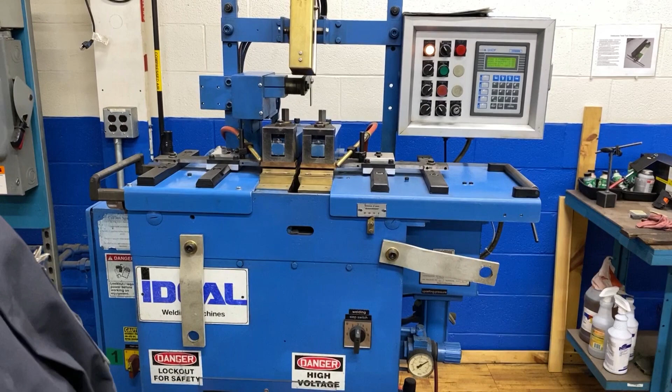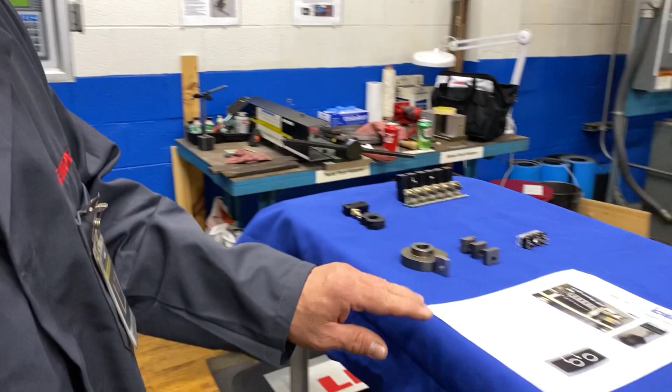Today we're going to walk through the calibration of an Ideal BAS-051 welder. The procedure we're going to be using is a paper copy that's very well documented and spells out each one of the steps as you go through to let you know exactly what you're adjusting.

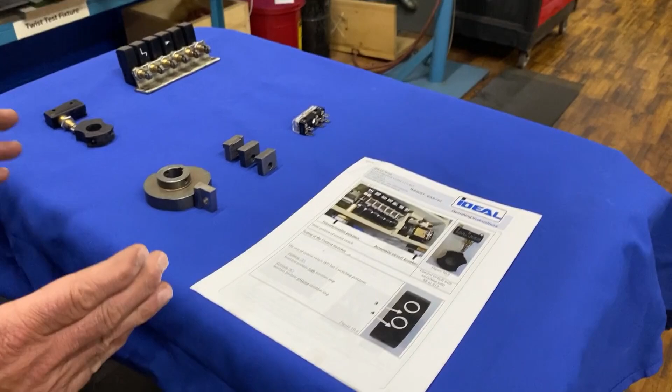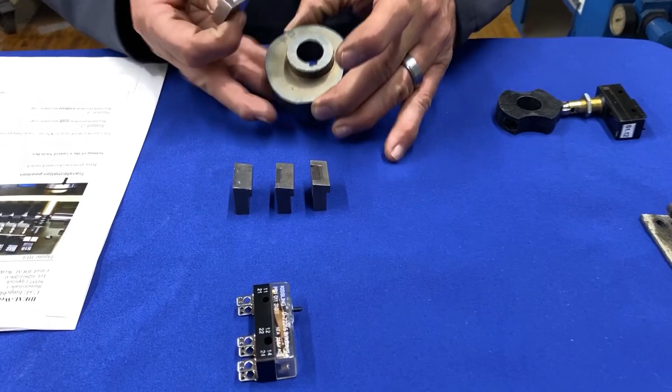So for clarity, I've laid out some of the components that we're going to be working with underneath the cover of the machine, just to give you a better view of what you're going to be looking at. So the cam we're going to be working with looks like this. And you can see it's numbered 1 through 6. And this is your cam follower.

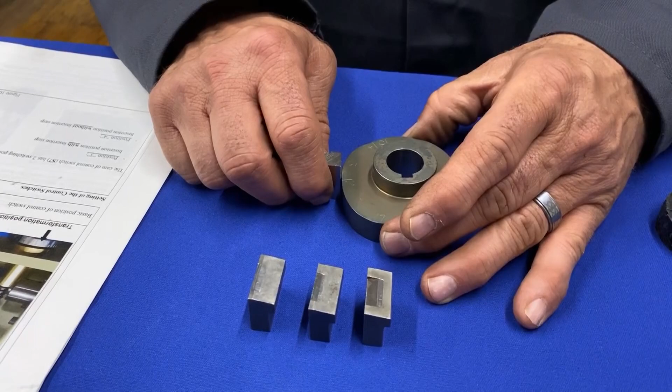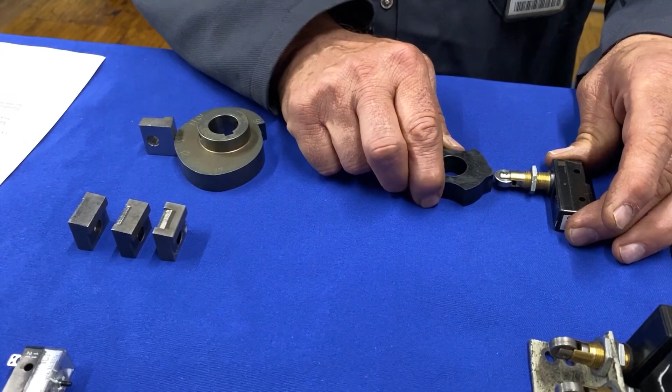During the procedure, we're going to be turning the motor fan to turn the cam to align the follower to a corresponding number. And then at that same time, we're going to be listening for this micro switch to trip from the actuator. This is the switch bar that's in your machine. This is the actuator that's going to trip it. And as you turn this, this is turning at the same time, and it's going to trip that switch. And that's when you're going to listen and come over here and validate that you're on that mark.

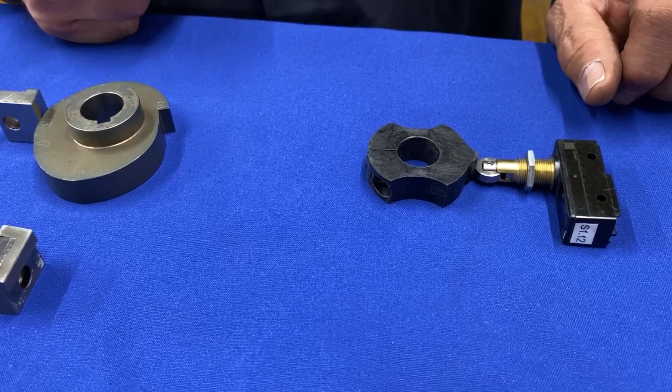If you are prior to the mark or after the mark when this switches, we're going to loosen this set screw right here, back it out, and slightly tap this in one direction or the other to make your correction so that you get a correspondence between the mark on the cam and the switch point on the switch. So let's go over to the machine and I'll show you what we're going to need for this operation.

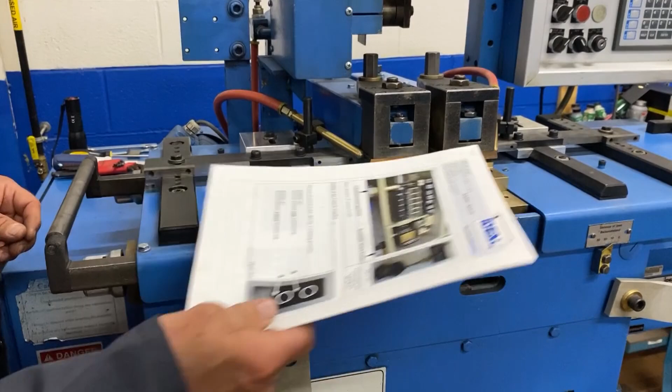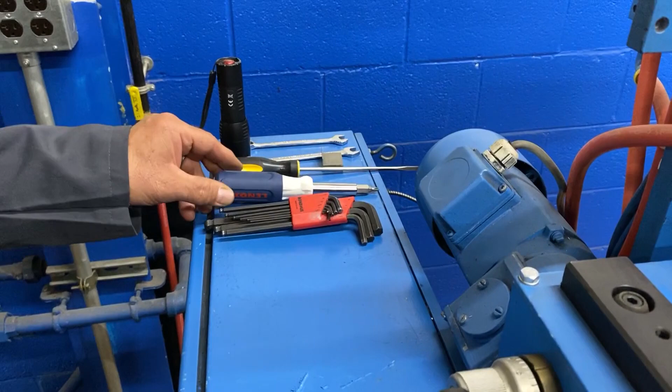So I have my instructions. I'm going to place those right over here. For this operation, you're going to need a set of metric Allen wrenches. You may need a Phillips head screwdriver to remove the end bell if it has a set screw in there. I'm using a flathead screwdriver as a poor man's stethoscope so that I can hear the switch trip in a noisy environment. You're going to need two 10mm wrenches, a flashlight,

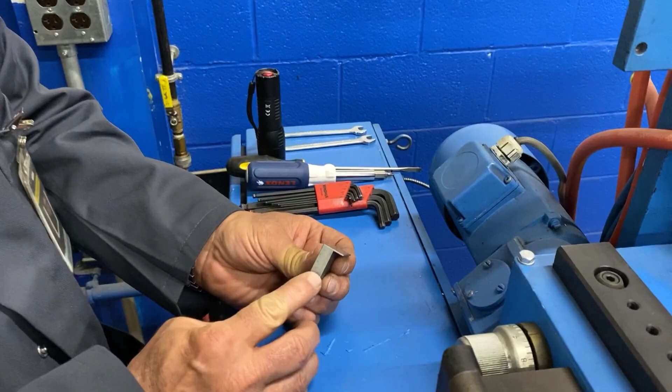and this block is actually a gauge that we manufactured. This is a 40 thousandths thick slab. This won't be used on this particular machine, but this process is suitable for 4 different variations of the machine: the 51, the 52, the 100, and the 120. So for the 120 being the largest of the machines, this will come into play in the adjustment of the automatic disconnect, and we'll show you that when we get to that step. So you won't need this for this machine, but you will need it if you have a BAS-120 and you're doing this calibration.

So the first thing we need to do is expose the switch and the cams. And that's under this cover here. We're going to loosen, remove our securing screws that hold our cover down.

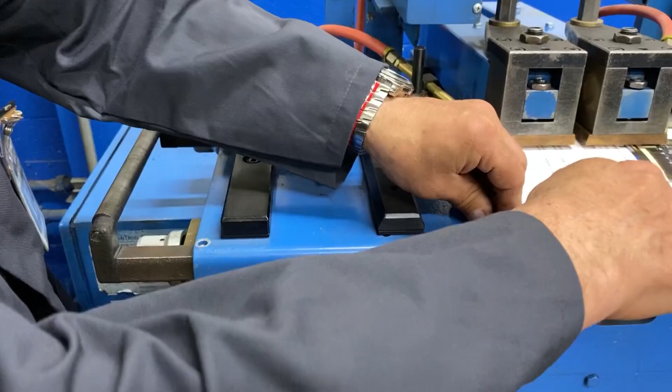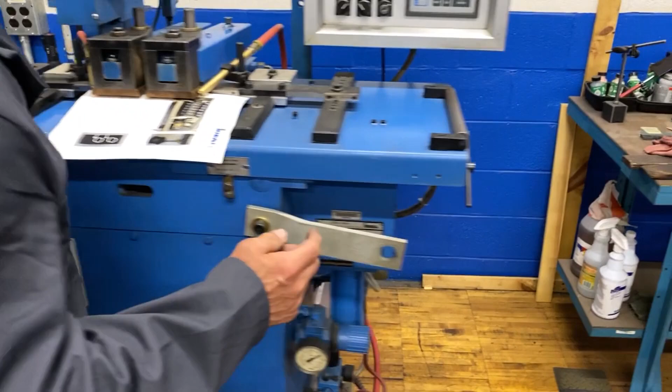So to do this procedure, it's not necessary to have the power on. So we could just turn this tap switch to the off position. The only thing you're going to need to have on to do this operation is your pre-pressure on this side of the machine. So your pre-pressure energizes the air to this cylinder that applies the pressure to this table to keep the cam against the follower. You're going to allow this to be in the on position for the majority of the operation. At one point, we're going to turn it off, and you'll see why at that time.

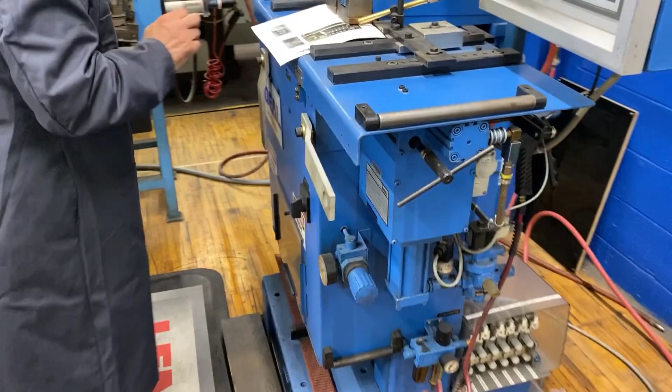So now that I've taken my screws off the top of the cover, I'm just going to lightly impact the lid here to break it free. Lift this cover off, place it on the side, and then I'm going to remove the end bell from the motor so that I have access to the fan to turn this for this procedure.

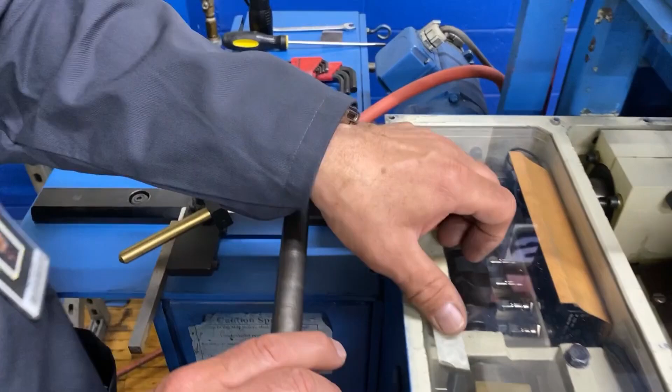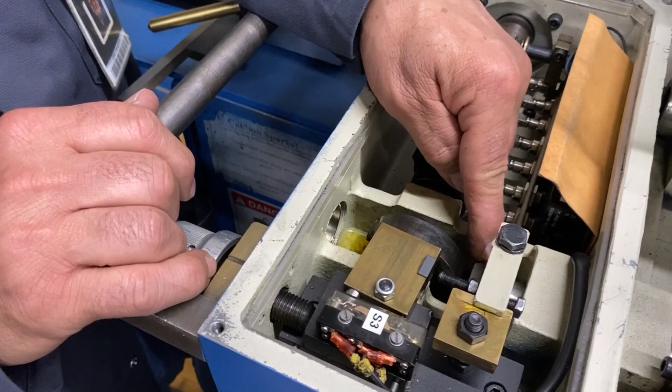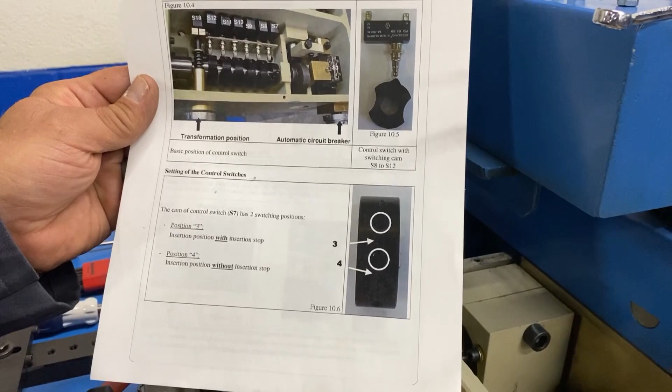So here you can see this is the cam. This is the follower that I showed you on the table. These are your trips, and these are your switches. This first cam is the starting position or the initial gap on your machine.

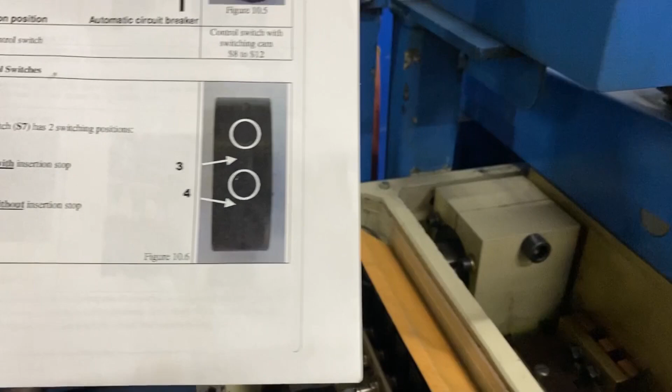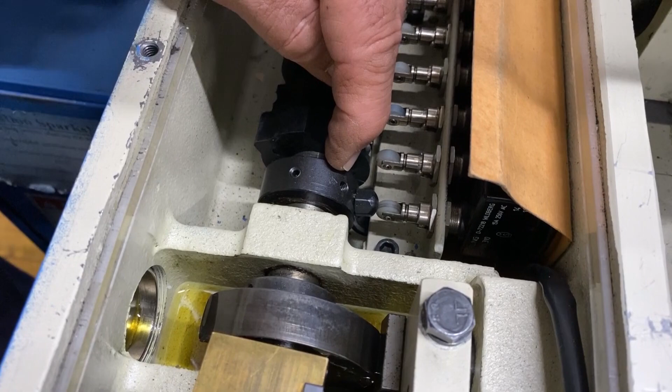You'll notice that there are two positions here, a position 3 and a position 4. If you have an insertion bar or a centering bar on your machine, then you want to make sure that this acorn nut is in position 3. If you do not have a centering bar, it would be located in position 4. So our first step is going to be validating that position.

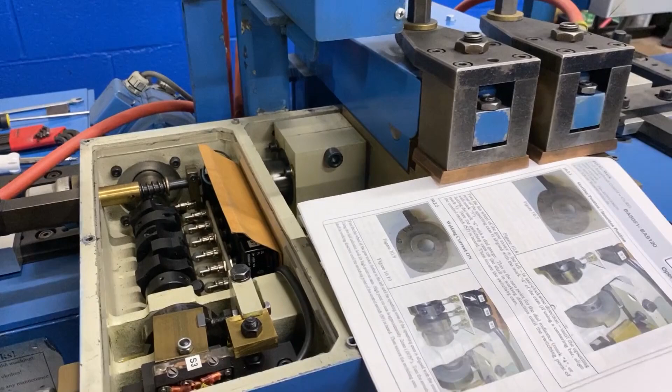So I'm going to back this cam off of that switch, and now I'm going to listen for that click, and I'm going to turn it in the correct direction.

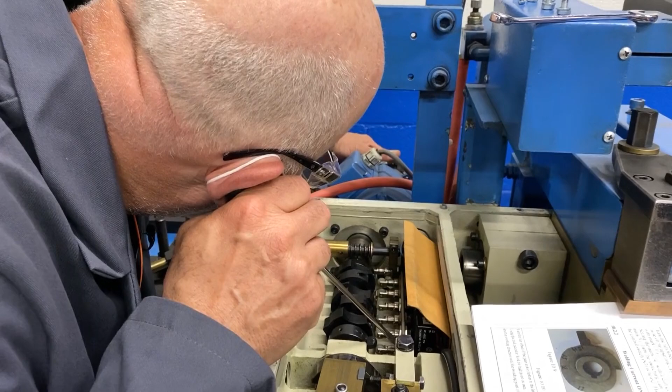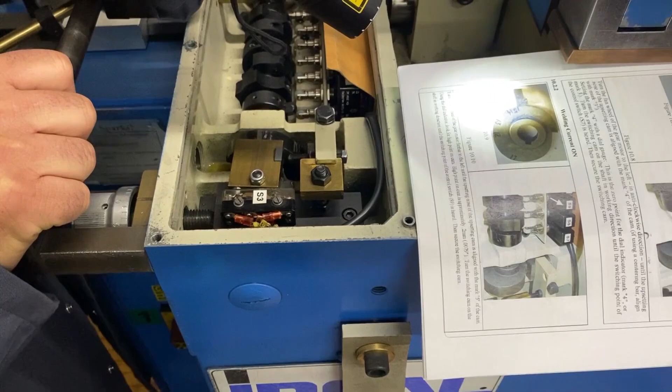And now I'm going to take my flashlight and I'm going to look for that corresponding alignment from the bottom of that cam that I showed you before to that number. That's what I'm looking for here. So in this position here, because we're in 3, my corresponding line is on 3. So I know that that's set correctly.

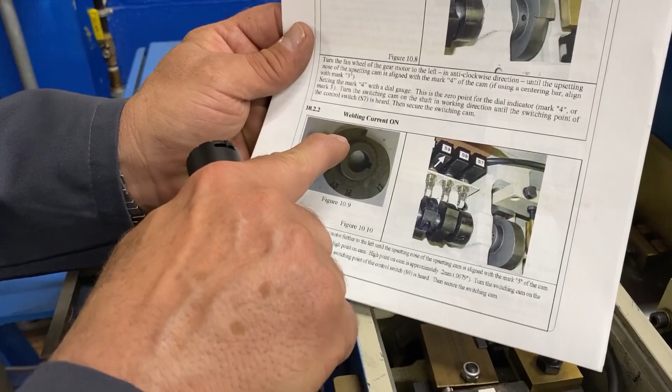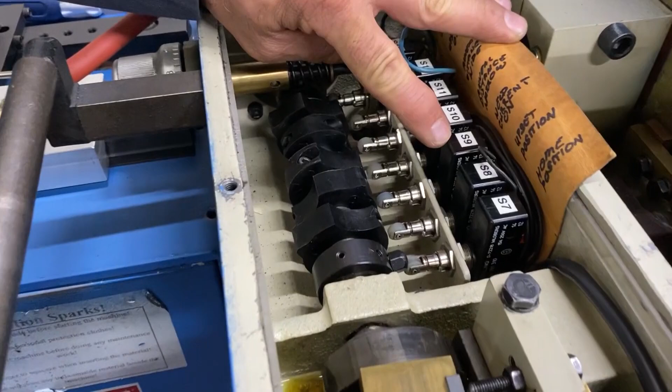So now we're going to be going to the weld current on. This is S9. We'll find that on here. Lift that up. Mark S9. And you can see I have the back of this marked with the corresponding function of that switch. Weld current on. So again, we're going to see where that trip is on that cam here. We want to move that to that switch position.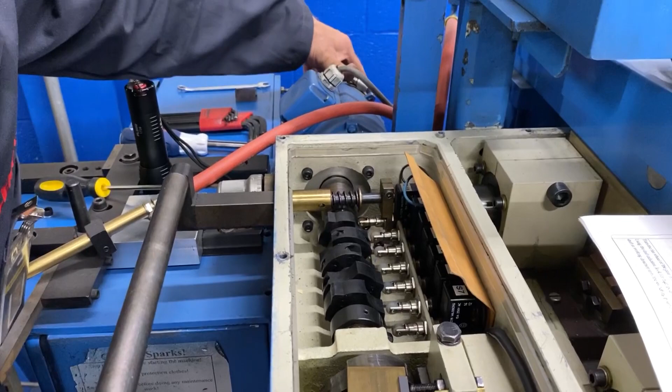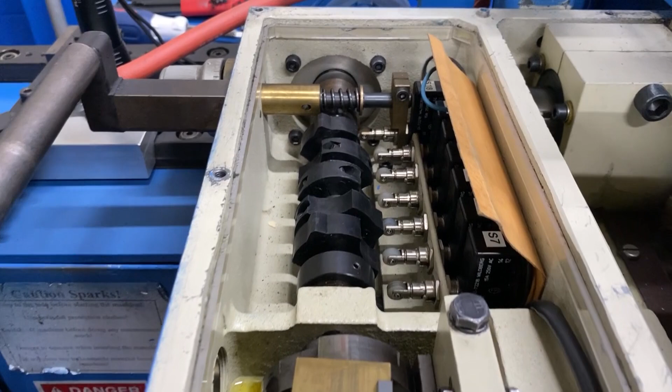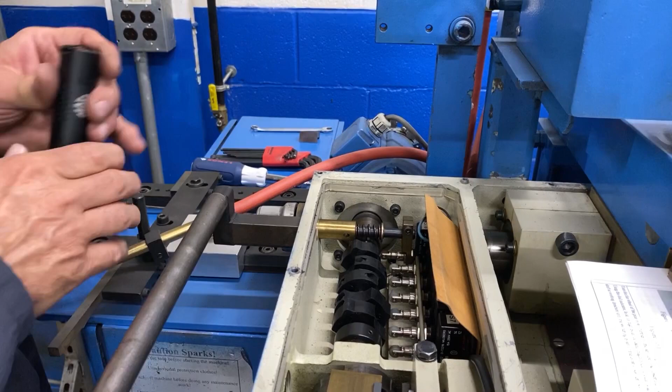I can move it quickly getting up there, but as soon as I see it touch, I want to stop, listen for that switch, and turn it very slowly till I hear that click. At that time, again, I'm going to look at my mark, and I want the bottom of that follower to be aligned with the mark on the cam. If everything is good, we move on to our next setting.

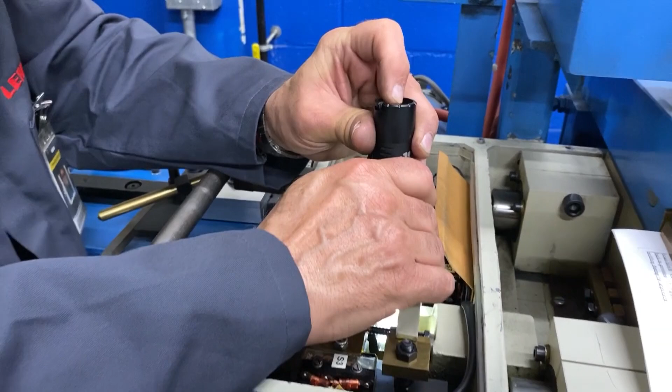This is the upset on, and this is going to be switch number S12. Just like before, find our S12, take a look where our trip is on there, and now I can quickly move until I see it just make contact with that switch, and I backed it off a little bit. And again, listen for it. Got my click. Come down here, look, and my mark is on my cam.

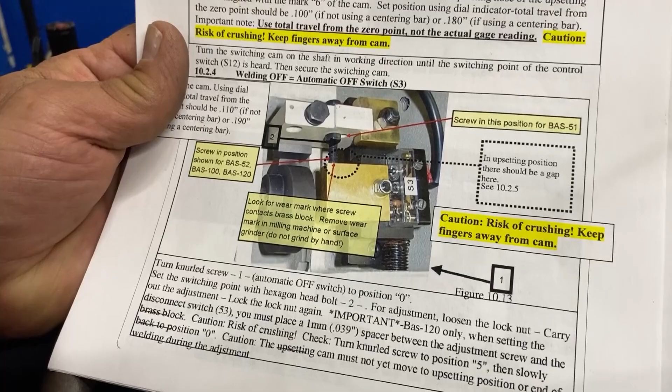The majority of the time that you're doing this calibration, it's merely going to be a validation of the switching point. You rarely will have to adjust, but we'll show you how to adjust should that be necessary. So at this point, this switch also corresponds to our next setting. So we're not going to move our switches at this time. Now we're going to check our automatic disconnect. This is the current cutout that shuts the voltage off to the jaws at the appropriate time. So these two work hand in hand.

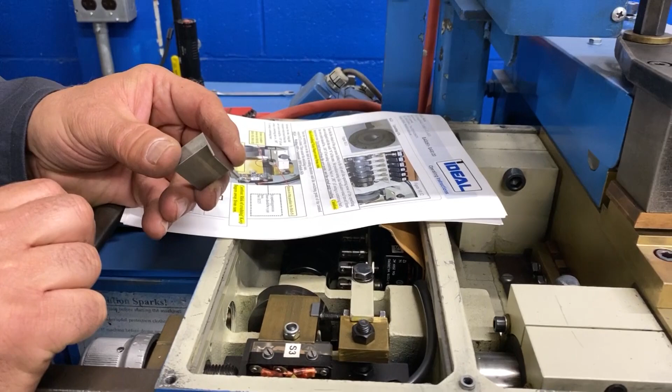So again, for the BAS-51, 52, and 100, you're going to be adjusting it just as you see it here. If you're adjusting for a BAS-120, this 40 thousandths feeler gauge needs to be introduced into this area to add that value. But again, this is for a BAS-120 only. So this is a smaller machine. This is not going to be used. But again, if you have that BAS-120, this is where that would be used.

So to do this adjustment, we're not going to turn the cam here. We're going to turn the dial on the side. If your machine still has the original switch that came with it, chances are it's going to have a clear cover, which makes it extremely easy because you can see the switch contact. And as I turn this out, you'll notice the switch into the closed position. And now when we turn it back, you see that switch point. You want that to be at 0.

Let's just say, for the sake of discussion, that it was not. Okay? So this is where you're going to use your 10mm Allen wrenches. I'm going to break free the jam nut on the back side of this screw. That's a trip screw for this. And then I'm going to see at what point it trips at and adjust this as necessary to get it to trip right at 0.

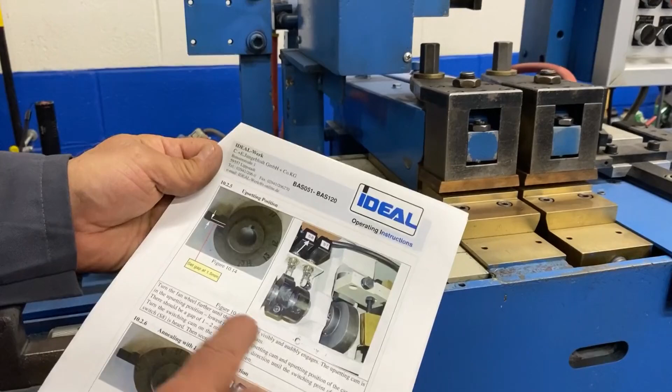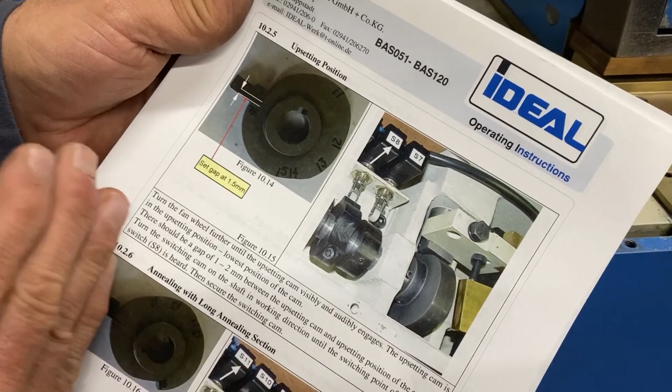The reason why I do this is on the next step, we're going to be running the cam so that the follower falls off the edge while trying to listen for the S8 to trip. If I have the pre-pressure on, the noise of the upset will mask the trip of the switch. So in this case, we want to have no upset coming on so that we can hear our switch trip. So find my S8. Listen for my switch.

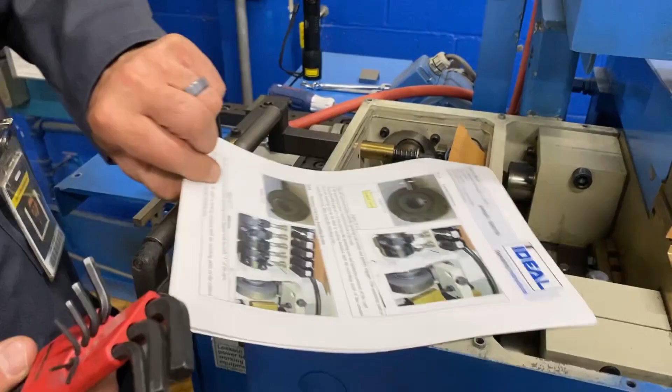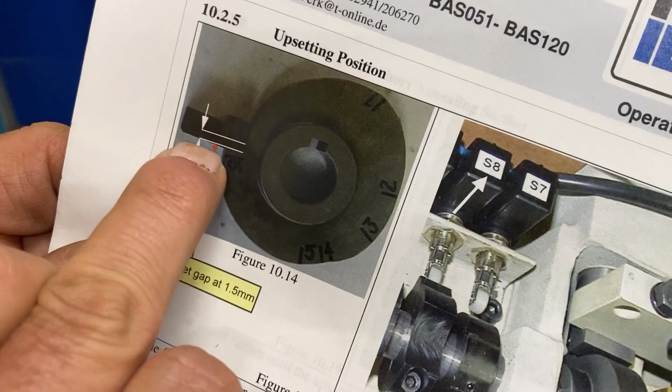And now I'm going to take and make a measurement. And we're measuring between the bottom of the follower and the flat of the upset on the cam. This is done, it's a 1.5 to 2 millimeter setting. So let's start with the 1.5, the smaller of the two.

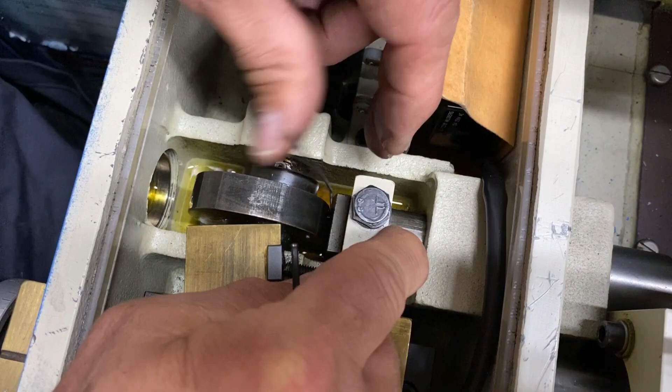And I'm going to lay this on the top of the cam surface. And I'm going to take the follower and I'm going to pull it forward. And you can see that there's a loose fit with a 1.5 millimeter. Now I'm going to take my 2 millimeter and repeat the process. Put it flat. I'm going to pull this forward, and you can see that I have a slight interference fit. I can't get it to go over to 2 millimeter.

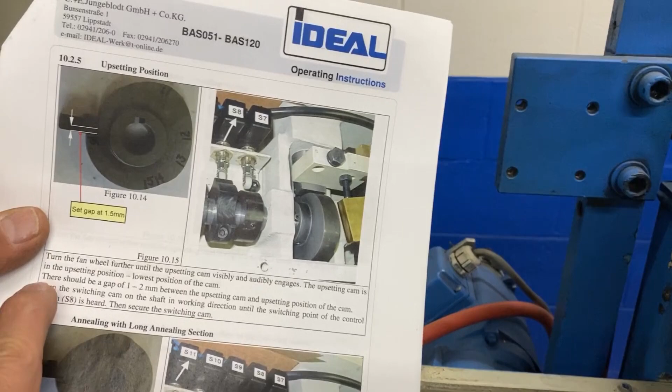So my adjustment here is somewhere between 1.5 and 2 millimeters. And if you look at our adjustment, there should be a gap of 1 to 2 millimeters between the upsetting cam position. So we have a 1.5 that went in and a 2 millimeter that did not. We're perfect.

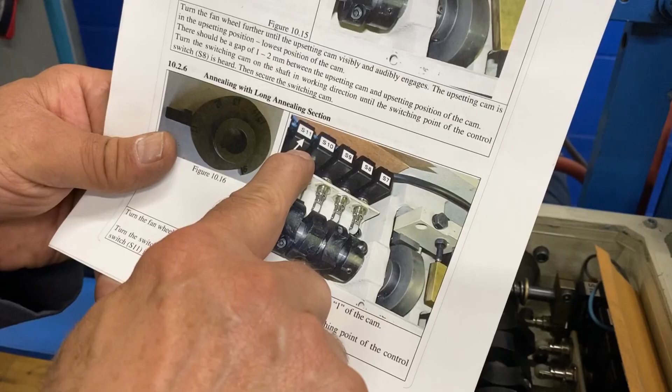Our next adjustment is going to be our annealing with a long anneal. This is your wide anneal. That's switch S11. So again, I come over, identify where my switch is. I look for where my trip is, so I know how far I have to go, so I can quickly turn this. Until I get up to this position where I barely see it touch. Now I'm going to listen for my click.

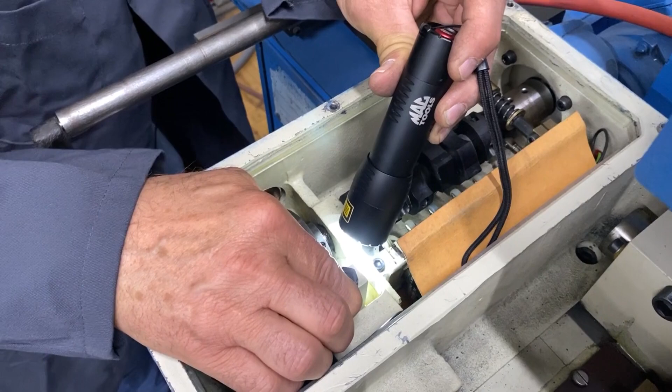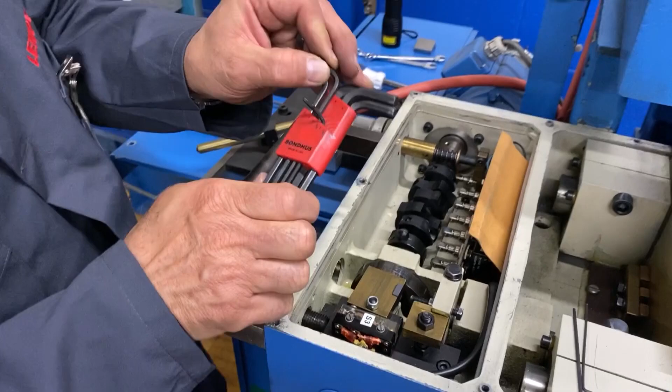I'm going to look for my mark. And in this case, because I have the pre-pressure shut off, I'm going to pull this forward and look at it. And I can see that I'm off a little bit, okay? So it looks like I'm a little early. So to adjust this, I'm going to take a 4 millimeter Allen wrench. Here's my S11. I'm going to put the Allen wrench into this set screw that's keeping this tight. I'm going to back this off. You don't have to go crazy, just enough to get it to move.

Now this cam is snug on this shaft, so it doesn't move very easily. So again, I tripped a little bit early, so I want to retard the setting or move this cam further away. So I'm just going to tap lightly on this side with the back end of the screwdriver. And you may not see it move, but I'm going to put my finger on it to get a feel for how much it did move. There, okay? Very subtle move. Generally speaking, these won't be a gross adjustment.

Now tightening this, you'll notice that I'm only using the short end of the Allen wrench. These cams are plastic. This is a steel screw with a steel nut behind it. If you use the long end and over tighten these, you'll draw that nut right through. You'll split the casting on that and it will shut you down. You'll have to disassemble this whole assembly to make that correction. So be very cautious when tightening these.

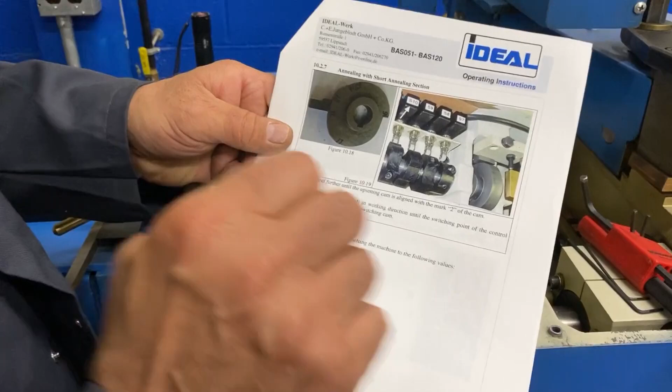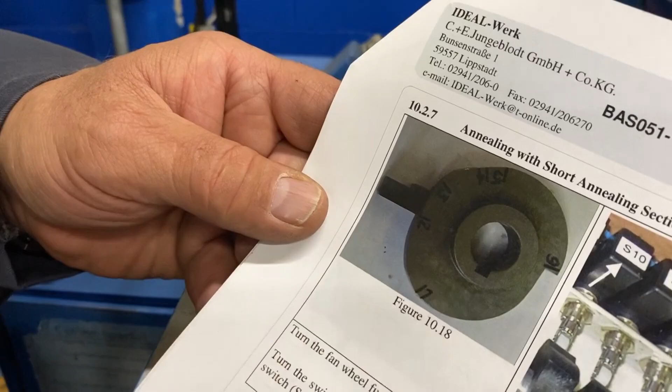Which is the short anneal. This is S10. And it's done in the exact same fashion. And it shows you the corresponding mark that you're looking for on this. So again, I'm going to look for my short distance, S10. Here's my trip. I can quickly move that lobe to that switch. See it starting moving, I back it off. Now I listen. I look for my mark.

And we're good. So at this point, you've validated the operation of most of the switches, made a minor adjustment to the others. You can now bring the machine back to its home position and then put your cover back on and get ready for operation. So to get it back to its home position, I'm going to turn my power back on. I'm going to turn my pre-pressure back on.

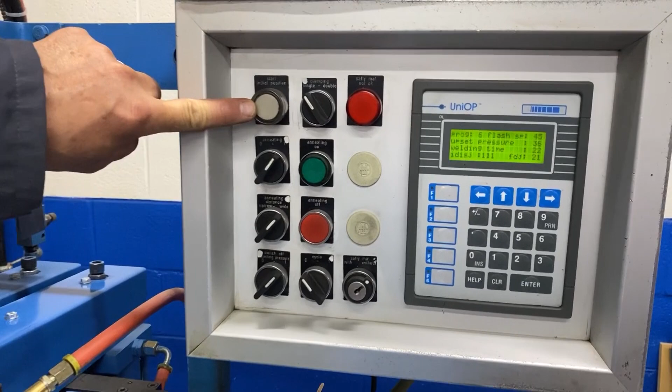And then lastly, I'm going to press the initiate button on the panel, and that will drive the cam to its home position. When the light comes back on, you know you're in your home position. If you look at your cam bar, you can see you're in your home position. Your calibration is done on this machine.

Now you can put it back together, make whatever adjustments are necessary for your camber alignment, set it up for your appropriate materials, and feel comfortable that you'll get a quality weld on a well-calibrated machine. Always make sure to restore all the safety guards that you removed to do this process, and that your screws have all been restored and tightened on your cover to ensure proper alignment and no movement in this side.